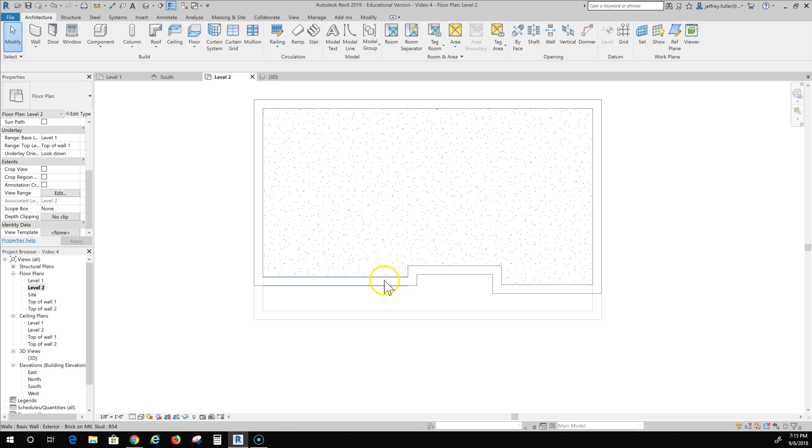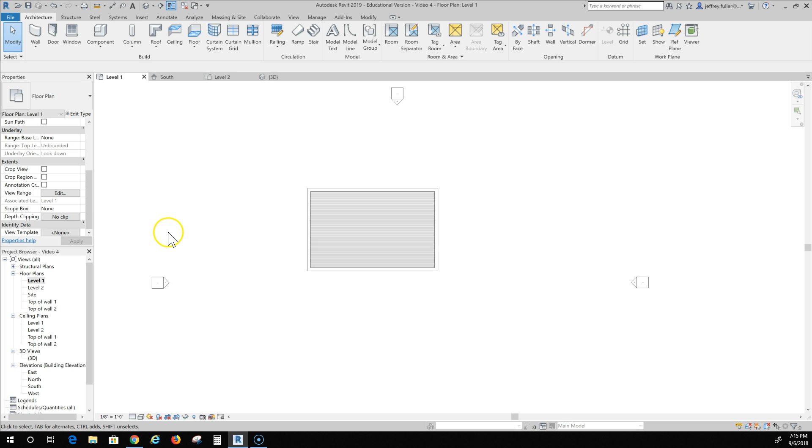Right now I'm in level 1, and actually I want to work from level 2 so I can see my level 1 under it. I need to see my level 2 as well, so I've got to use that as a reference. Level 1 does not allow me to see anything above it, even though it's supposed to. It's just not working for some reason on this particular version, or maybe it will be on an update later, or you may be able to do it on yours and there's just something weird about mine.

So I'm going to go to level 2 to work on my first floor roof, and I'm going to go up here to the roof tool and roof by footprint, and change the roof type to this wood rafter 8-inch with asphalt shingles.

Then come down here and look at some of my properties. Everything should be good. There's one thing I'm going to change because of the way I'm doing this. It says base level 2. I want this to be top of wall 1. That way I'm going to be drawing down here on the first level, the top of the first level walls.

Right now, by default, it has this pick walls option that will allow me to pick the wall and place the roof. But of course I don't want to do that on the sides because there's not going to be any roof on the side.

So I'll start with just leaving it right here on the pick walls. I'm going to come over here, and there's some things in the option bar that we want to pay attention to. This right here says defines slope, and that's going to define the slope, whether it's going to be 6/12, 9/12, or what have you. That's the angle of the roof to where you make your hips and/or your gables.

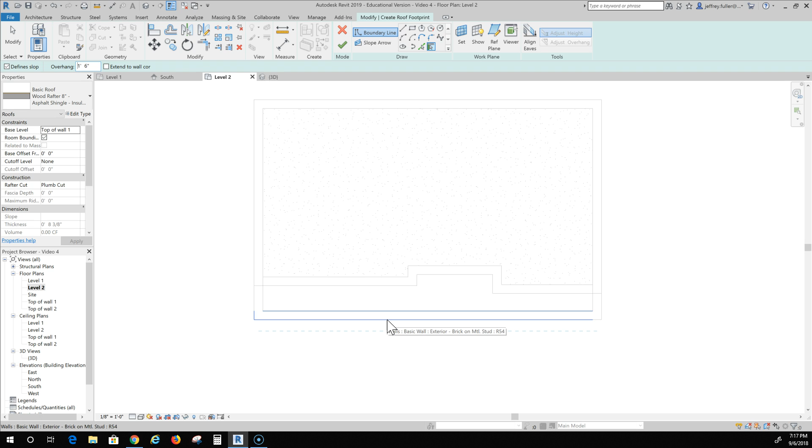Now if I hover over this wall, you can see how the offset with the dashed line appears 18 inches from the wall. I'm going to click there to accept that. And I'm also going to change my slope - instead of 9/12, it's going to be 6/12. Okay, so there we go.

Next, I'm going to have to draw these lines manually. So I'm going to go here to the draw tool, or the little draw panel, and select my line tool. Let's see if this is going to work right - okay, now I've got to reset my overhang to 18 inches, just I guess because I changed tools. So I want to go - I'm not sure how this is going to work, so I'm going to experiment here.

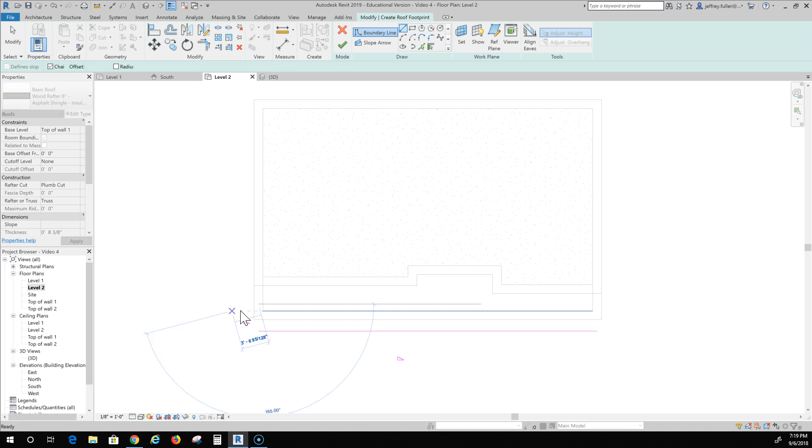Okay, it's offsetting to the wrong side. It's not really giving me a preview of the offset, so I'm not sure what it's wanting to do. Alright, here's what I'm going to have to do - let's see what happens. We'll change this to a negative 1 foot 6 inches because it's wanting to go to the inside. This maybe will have it go to the outside. But it's still doing it. Well, if there's a way to change that - yes, there is. No, there isn't. So it's not playing nice with me right now.

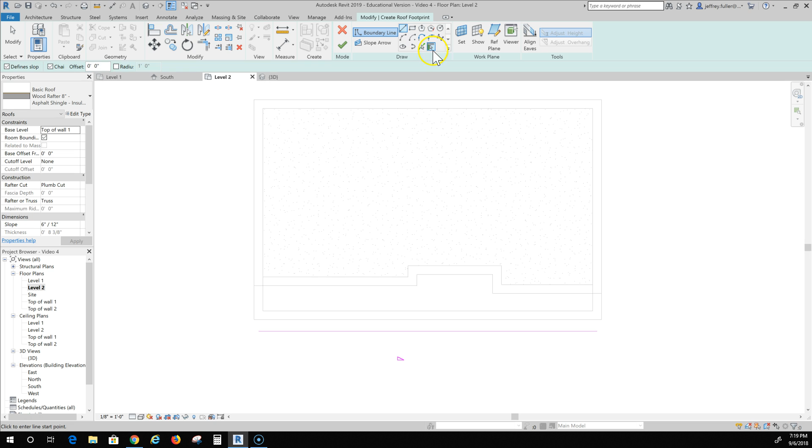The delete button, back to my line tool. Tell you what, let's do this - let's go back to pick walls. Define slope at 6/12. I'm going to pick this wall, then I'm going to edit it. And I'm going to pick this wall, then edit it. So I'm going to escape out of that and then pull this down to here.

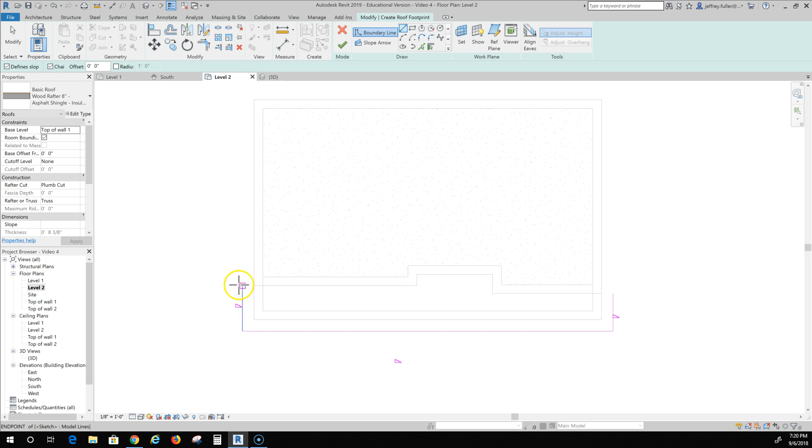Alright, so now I've got the front and the sides of that part of the roof, the first floor. Now I'm going to have to manually draw a line back here. I'm going to click on the line tool. Now because this is going to be right up against the wall, I don't need an offset, I don't need a slope. Okay, no offset, turn off the defined slope. Connect up with this line here and just draw right along with...

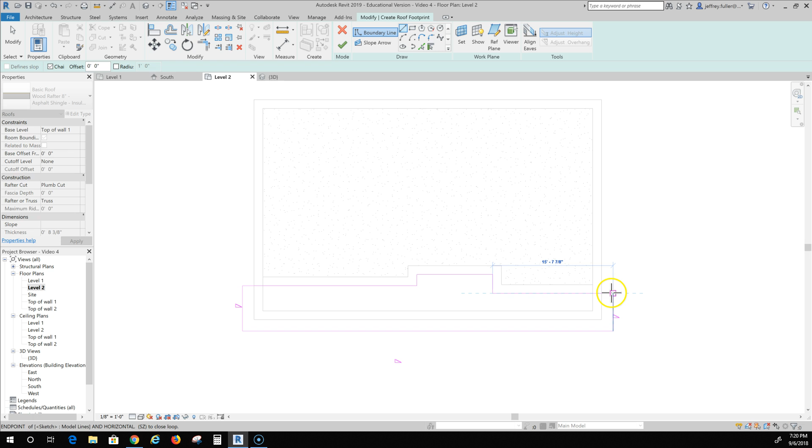...the second floor wall. There's one other thing I've got to do - I've got to go back and change this because this says 9/12. So I've got to change that to 6/12 as well, and I've got to change this one to 6/12 as well.

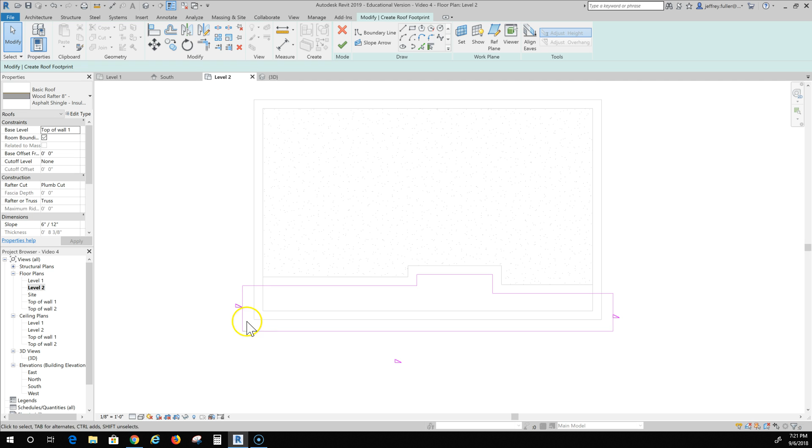Okay, so now everything should be hunky-dory. These little slope marks tell me that I've got slopes on the sides and slopes in the front. So it's going to make more or less like a hip, and this will be a hip ridge right up through here when I get done.

We'll have to go in and inspect our work, see how this is going to turn out. So I'm going to go to the 3D view and click on the green check mark.

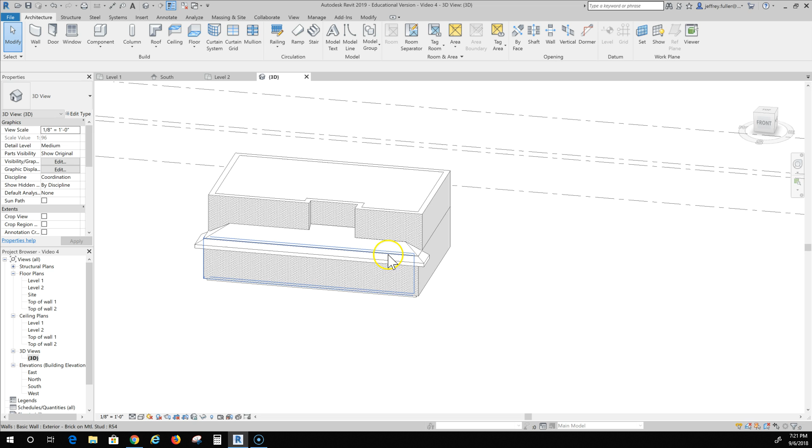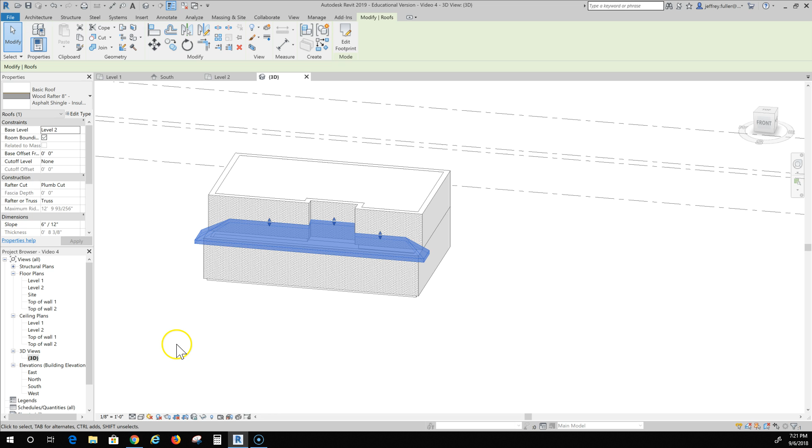Everything looks good. I think the level is a little off, so let me click here. Top of wall 1... actually, level 2 is what I want, because remember I have that little bit taller first floor wall than I do on the second floor. Okay, so that gets your first floor roof right there.

Now we're going to go up to the second floor, and this will be maybe a little bit easier for now. I think we are going to run across a slight problem because I'm going to put gables here, and then we have to make some adjustments for those gables.

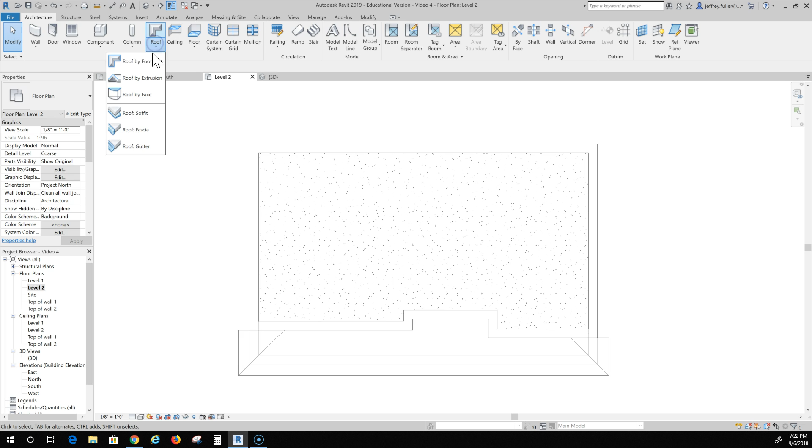So here we go, I'm on the second level right here, level 2, the same level I was working on for the first floor because I needed to be able to see my second floor. I'm going to do a roof again, roof by footprint, same roof, but this one is going to be base level, top of wall 2. I want it setting on top of the second floor wall.

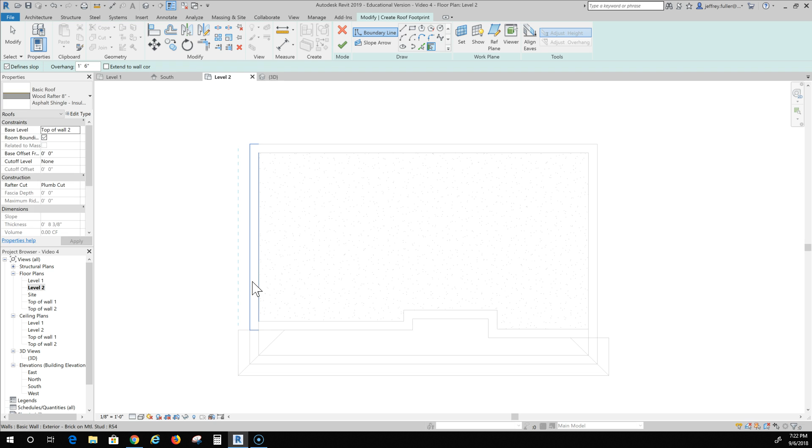Now all I do is define slope here. I still want the same overhang, it's kind of defaulted from before. So slope here, slope there, slope there, that's all my slopes. I'm also going to have a slope here, and a slope here. Okay, so those are my gables.

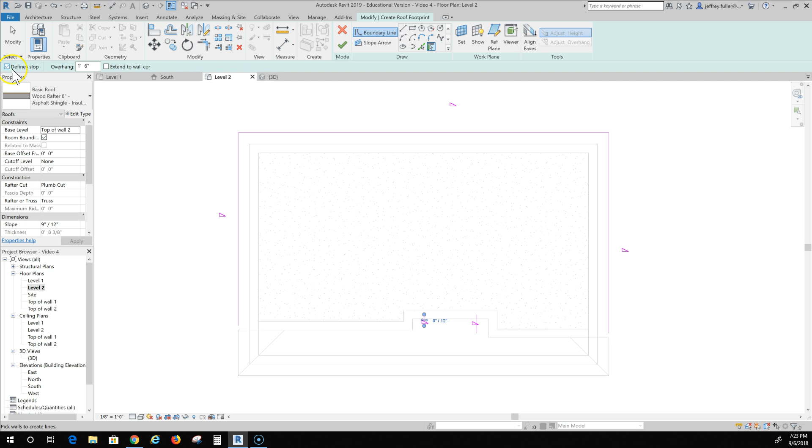Now I'm going to go in and do some manual editing. Or no, I'm not, I'm going to still use this. I'm just going to turn off my defined slope, click there to turn the slope off, and then I'll go ahead and get these other pieces of wall that I did not get previously.

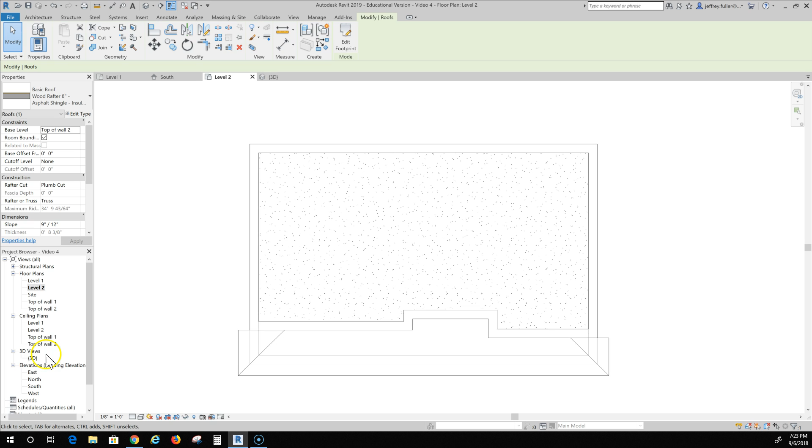I'm going to have to kind of play with this area right here to make sure that turns out like I want it. Then we'll click the green check mark and I'm going to go to 3D view to check out my handiwork. Everything is good so far.

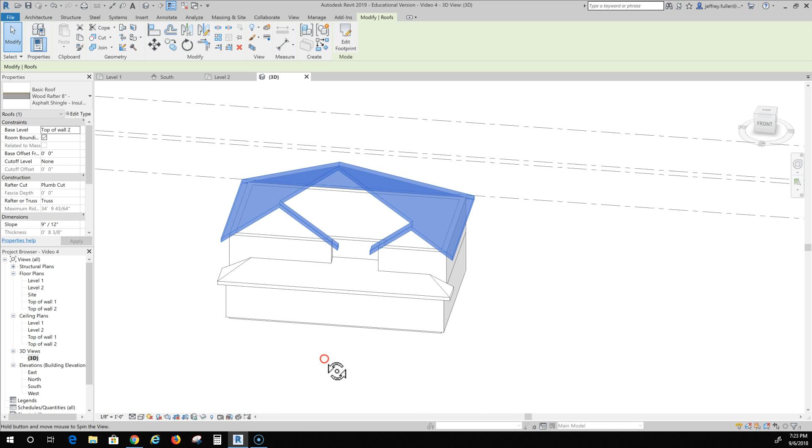Alright, there's one other thing I got to do here, and that is make sure that my walls extend up and are connected to the roof itself underneath the eaves there. So I'm going to click on the walls, and I'm going to do it carefully, one at a time, because there's some troubles that I could run into.

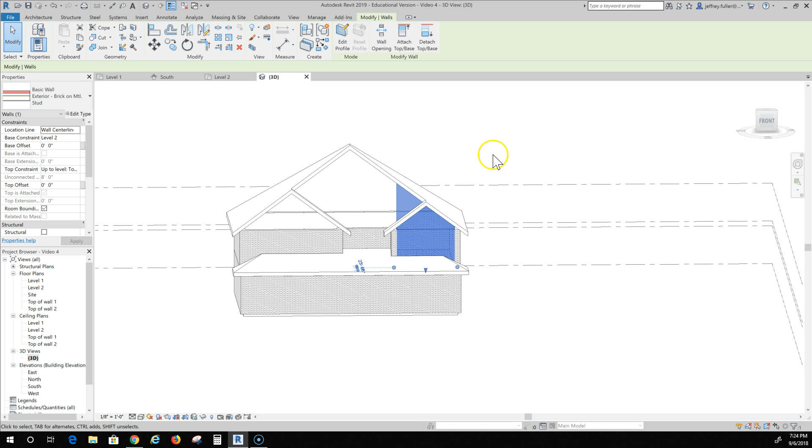So here, my top constraint for this wall... no, I won't even use that. I'll go over here and use this tool, modify wall tool, attach top to base. So what it's asking me is I want to attach the top of this wall to the base of this roof. I have the wall selected, I click on attach top to base, and I click on the roof. And you see there, it did what I wanted it to do.

Alright, I'm going to have to make some adjustments over here, and I will show you how to do that, probably on another video. Okay, now I want to pick my little side walls there, attach top to base.

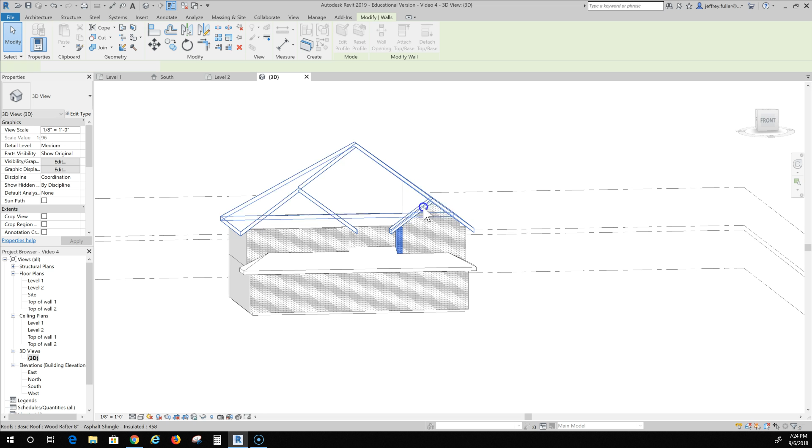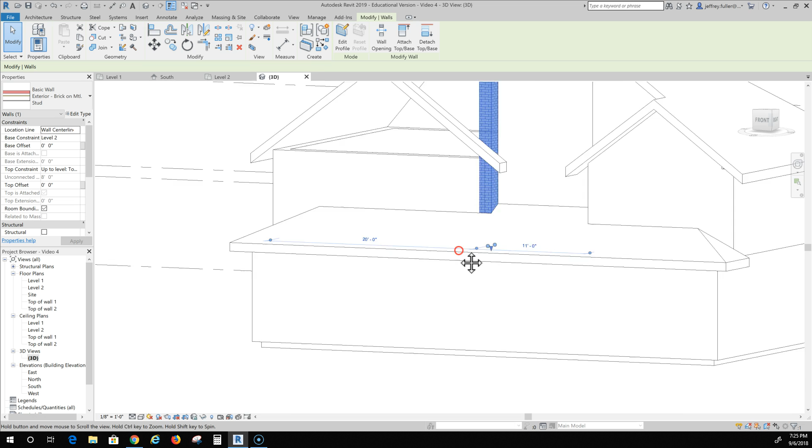I want to pick this back wall here, attach top here. Select that little wall up in there, oops, that piece of wall, attach top to base. And then I'm going to go here, click on that, attach top to base.

Now I need to do that all the way around as well, like here. And I was just doing that because I really wanted to watch the behaviors of what's going on here, so I'll know what I need to do to make some further adjustments later on.

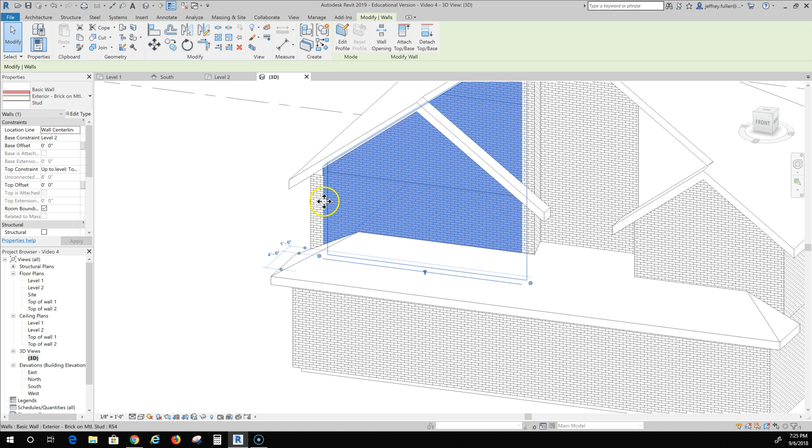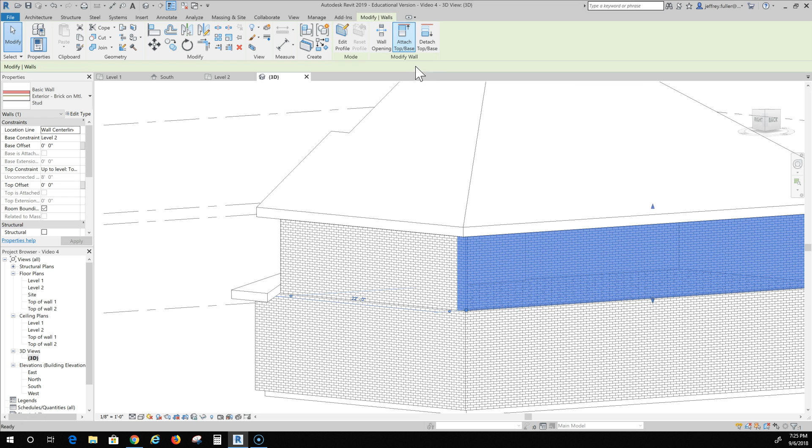I'm going to click here, attach top to base. Click on this wall, attach top to base. And this back wall, attach top to base. Oops, let's try that one more time. Attach top to base. Okay, so now we're good to go.

And if you look under there, you'll see everything's attached. Now the only thing I have to fix, I'm going to go in here and add some color, go to shaded, so you can see what it is I have to fix.

I have to come back in here and fix this, which I will come back and show you on a different video. I'm actually lucky that everything came out as well as it did. Sometimes there's a lot more adjusting that you have to do. This one came out really, really well.

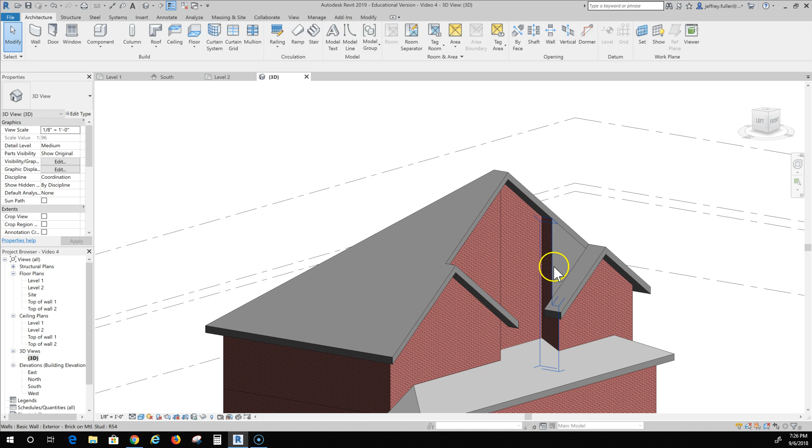I need to try to figure out why that brick did not go all the way up to the top like it should have. Actually, I think I could figure that out here on this video, so just stay right where you're at. I'm going to pause it.